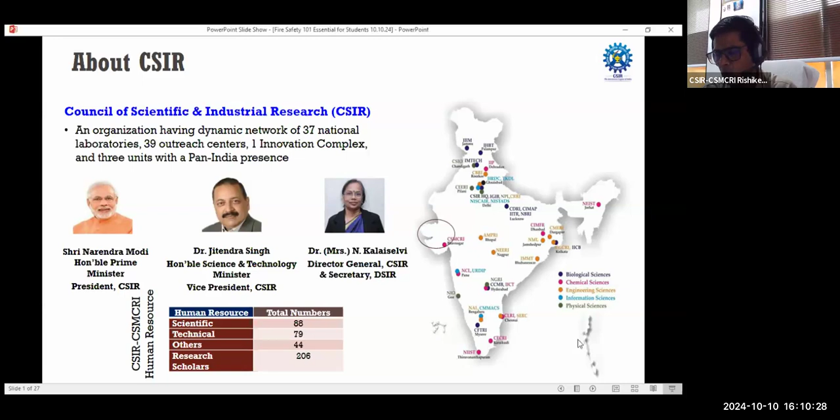Okay, so basically the journey of CSIR started with the huge demand of salt between 1947 to 48, and afterwards in 1948 the government at that time decided to constitute a committee with Shri P A Narielwala, and under the supervision of Sri C.C. Desai, the then Secretary of Ministry of Works, Production and Supply in 1951.

They started working to fulfill the demand of salt. So in Saurashtra, near about 125 acres of area was given by the government to us, and this institute was inaugurated on the 10th of April 1954.

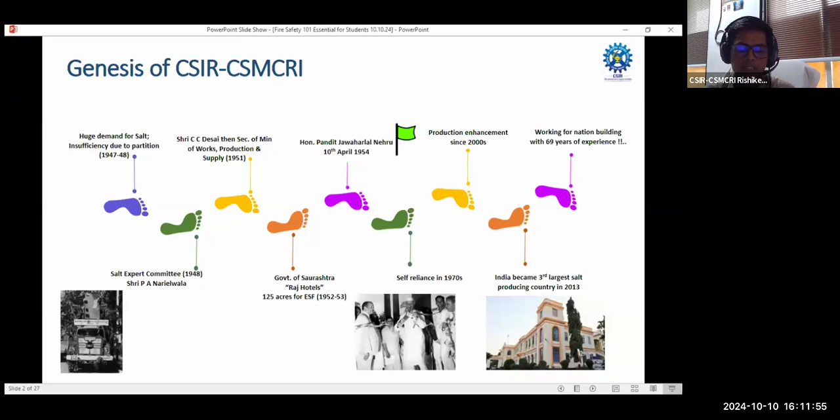We became self-reliant in production since the 1970s and 2000s. India became the third largest salt production country in 2013, and we have an experience of 69 years, serving to build the nation for the last 69 years.

Okay, basically our mission is based on three major pillars. There's our marine products and processes, in which salt, water, marine chemicals, and marine elements are included. Marine biology, in which marine aquaculture, salt tolerant plants, marine biotechnology, marine microbes, marine bioactive processes, and others are considered. And we are also focused on the marine environment, where we are exploring marine pollution.

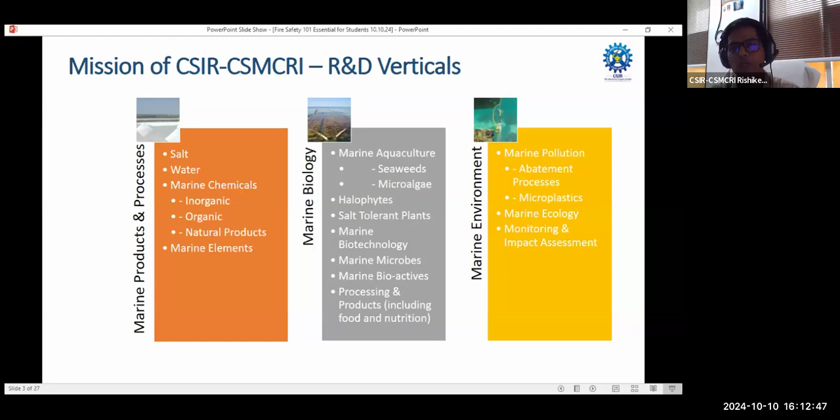Microplastics nowadays have become more of a headache for the environment, so we are also looking forward to how we can overcome the situation, along with marine ecology and monitoring of impact assessment.

In our institute, we have various departments, in which our major departments are Analytical and Environment Science Division and Centralized Instrument Facility, where you will find lots of instruments related to scientific work, and the analysis we perform in-house.

We have a Salt and Marine Chemicals department. This department looks after all the salt and marine chemicals related experiments, research, and how to enhance the productivity of salt. We look after all these things.

Inorganic Materials and Catalysis - we also deal with inorganic solvents and chemicals to give a social impact with respect to chemicals. Natural Products and Green Chemistry - this department looks after green chemistry and natural products.

Applied Phycology and Biotechnology is basically focused on marine algae, plantomics, membrane science and separation technology. This also gives impact on how we utilize water, or how we can purify water with the help of these membranes.

So we have a separate division for Electro Membrane as well, and Process and Design Engineering, where whatever process we are designing, we work on how to enhance it, how to go further, how to upgrade it. This division looks after that.

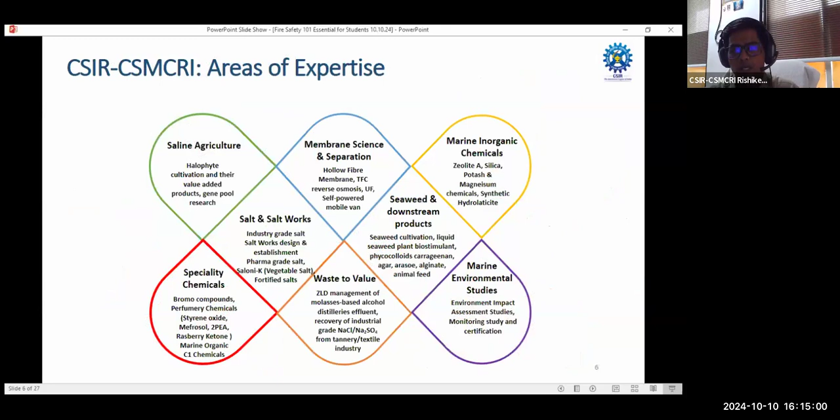Talking about the broad overview of current research, we have chemical research and biological research, and there are so many fields in which we are giving steps forward. The main areas of expertise are saline agriculture, salt and salt works, specialty chemicals, waste to value, membrane science and separation, seaweed and downstream products, marine environmental studies, and marine inorganic chemicals.

We also have ACSIR, that is the Academy of Scientific and Innovative Research, where if someone wants to do their PhD, they can join as a student and perform their PhD over here. We have two branches, PhD in Science and PhD in Engineering.

In 2022-23, we had almost 153 students, and we are also running UG and PG programs, with a minimum duration of 2 months for students. If someone wants to come for training, internship, or dissertation, they can also join.

So this is all about my institute in which I am working. Now we start with my presentation, that is Fire Safety 101: Essential Tips for Students. Okay, just before starting, can I ask you some questions?

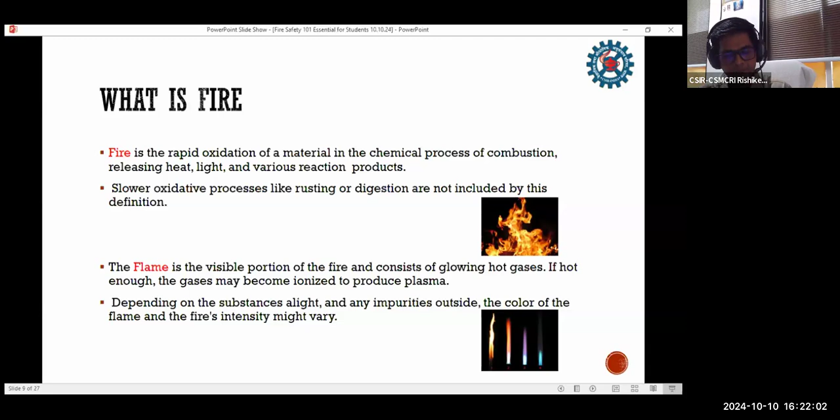To understand fire more, we have to understand the fire triangle. What is the fire triangle basically? The fire triangle is a combination of heat, fuel, and oxygen.

It will occur when the chemical reaction or the ignition is there. For example, you are sitting in your room or maybe in your home. All the three elements are present meeting with each other, but there is no fire just because there is no chemical reaction or any ignition taking place. When the fourth phase comes in contact with these three fire triangle elements, this is known as the fire tetrahedron.

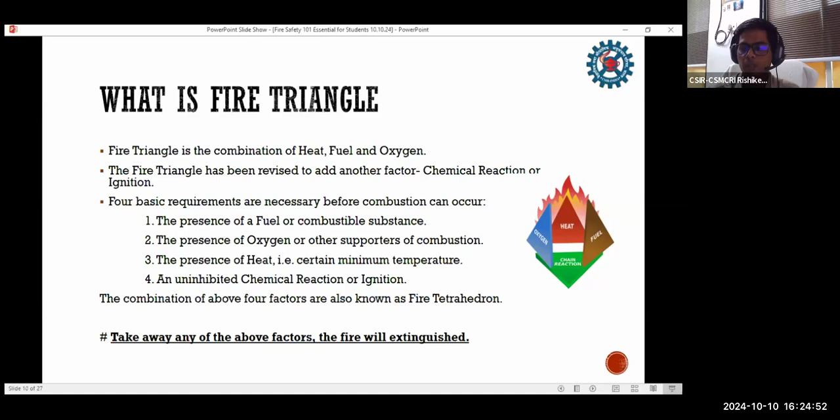So in that way you can extinguish the fire. Second, the heat. When fire occurs, we always use water to extinguish it. By doing this, we are cooling down the thing and cutting off the heat of that material. Third thing, the fuel. Just take away the fuel, do not provide fuel to the fire, and the fire will automatically extinguish.

Now, the classification of fire. This is the most important part to understand any fire for the extinguishment purpose, because when you know the classification of fire, you can easily understand which class the fire belongs to and how you are going to extinguish it. According to the BIS, that is Bureau of Indian Standard, fire is classified into four classes, that is class A, class B, class C, and class D.

Class A is basically known as the general fire, ordinary fire, or solid fire. For example, wood, paper, plastic, cloth, etc. are considered under this class. Class B is flammable liquids, all petroleum products, oil paint, solvents, and some chemicals are considered under this class. Class C, as per the BIS, has two categories, electrical and flammable gases, so these two are involved in class C. For class D, we have combustible metals like sodium, white phosphorus, etc.

But if you go abroad or away from India to any other country, you will find two more classes over there, that is class E and class K. According to that, class A remains the same, ordinary fire or solid fire. Class B remains the same, flammable liquids. Over there, class C stands for the gaseous or flammable fire. Class D remains the same. Class E stands for the electrical fire.

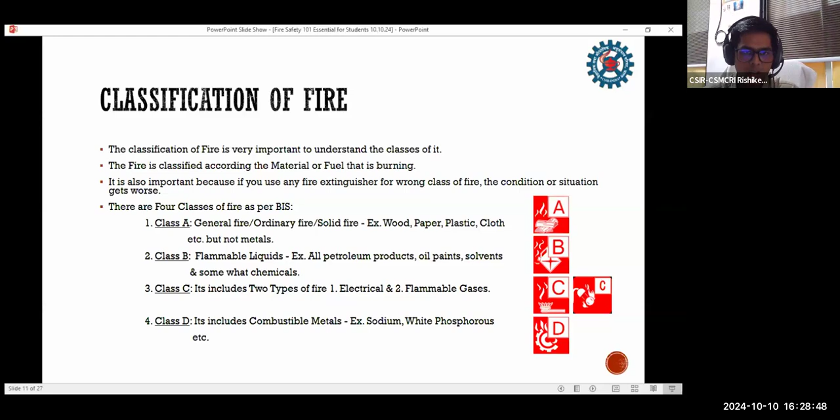Okay, basically we are having two types of firefighting protection. First one is active fire protection, and another one is passive fire protection. Active fire protection and passive fire protection, you can say, are the main pillars of any firefighting protection. These two elements cover a major portion of the protection service you should have all the time.

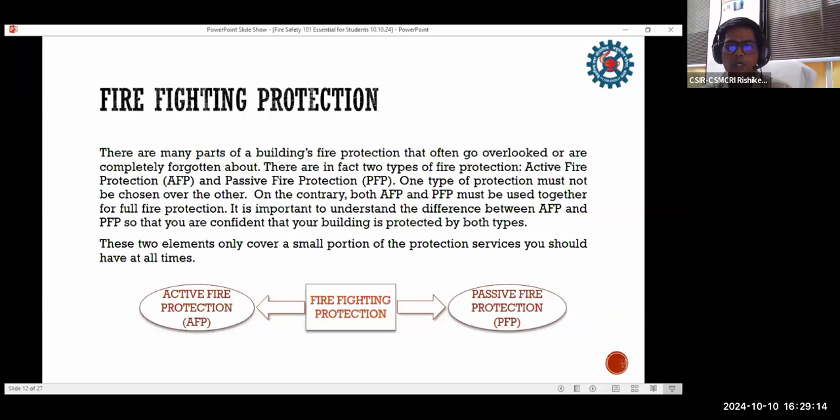So what is active firefighting equipment or protection? Active fire protection means using fire extinguishers or automatic fire sprinkler systems or any hydrant system which are actively activated all the time, and it requires manual operation or automatic operation.

For example, a fire detection system. If you take a fire detection system, after picking up a signal from any fire source or maybe smoke, it will trigger a response and alert the concerned departments, and activate the sprinkler system, or maybe it is assigned to activate a number of systems, like activating the sprinkler system, closing the fire doors, or maybe it starts sounding an alarm, and so on.

So these are active fire protection. Working fire alarm systems and fire suppression systems can greatly increase your chances of suppressing or even extinguishing a fire before it causes harm. So active firefighting means the equipment which are actively charged, or you can actively operate at any point of time.

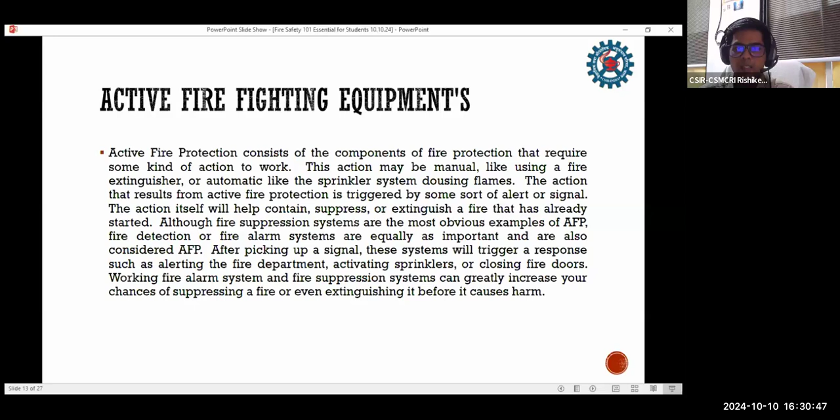Passive firefighting equipment means the fundamental components which are used to protect from fire in its design, or when you are just constructing something, it is already considered under this structure or design. Like for example, the walls. The walls act as passive fire protection.

By using fire walls or fire resistant walls and floors, the passive fire protection gives people time to escape from a building that has a fire.

For example, a damper. A damper means if something has happened, it automatically closes the door, that is called the damper. So something has happened and the damper gets the signal, and it starts to close the door and separate the fire and smoke through building ducts, and fire doors which compartmentalize the fire. By doing this, the fire will just adhere to a particular area, and the rest of the area will be free from the fire and can easily be used to rescue someone or for evacuation purposes.

By fireproofing successfully, compartmentalization of fire keeps damage to a minimum by eliminating the possible fuel a fire could use to spread or ignite within the first place. A small fire, or a fire restricted to a small area, gives you a greater chance of putting it out, avoiding cost and avoiding injuries.

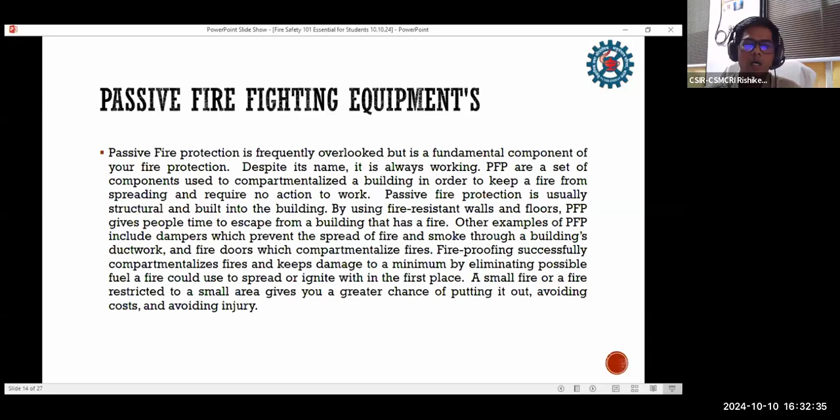So is it required, both things? Yes, we require both things. Why do we require both things? Just because it gives better protection against fire. The active and passive are fundamentally different in their behavior, but when we equip them together, they give a better possibility or better performance for better protection of life as well as the structure.

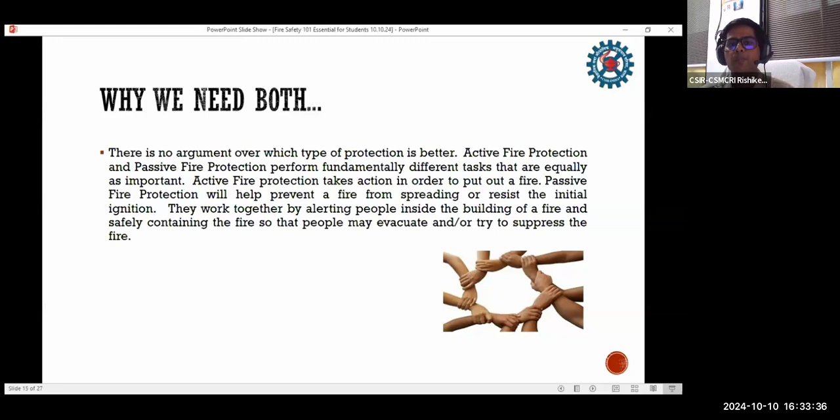It also helps to protect or prevent a fire from spreading or resist the initial ignition. They work together by alerting the people inside the building of a fire and safely containing the fire so that people may evacuate and try to suppress the fire.

Now, fire extinguishers. A fire extinguisher is a device used to put out fire of limited size. Basically, fire extinguishers are also known as first aid to fire. It means a small or moderate fire can be easily extinguished by means of a fire extinguisher.

With the help of quickly and effectively reacting to the beginning of an incipient fire, countless incidents have been prevented from developing into large-scale disasters. If you are quick enough to use the fire extinguisher in a proper way at the proper time, you can easily extinguish any fire and avoid further chances of large scale disasters, or avoid allowing the fire to spread to a higher level. As I told you, fire extinguishers are first aid to fire. Basically, these are available in the market in two variants.

First one is your cartridge type, and second one is your stored pressure. But nowadays, 90% of organizations in the market use the stored pressure type, just because it's very easy to use. You can easily operate the fire extinguisher and extinguish the fire.

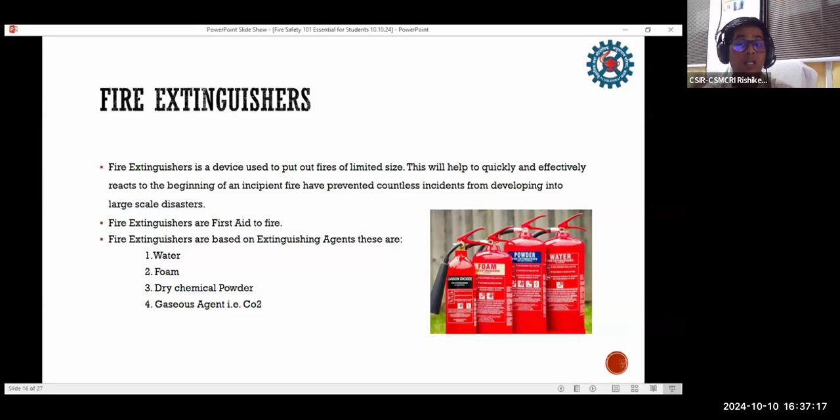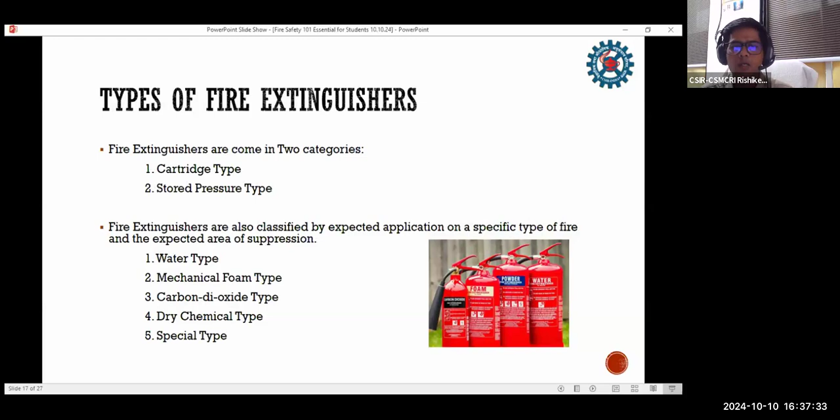So as I told you, we have two categories: cartridge type and stored pressure type. We have different types of fire extinguishers: water type, mechanical foam type, carbon dioxide type, dry chemical type, and special type. Now, how to use the fire extinguisher?

It's a very simple thing. When using the stored pressure type fire extinguisher, simply you have to remember one word: PASS. P-A-S-S. Pass means pull the pin. There is a safety pin on the mouth of the valve, you have to pull it, aim at the base of the fire.

The hose which is provided with the mouth of the valve, you have to hold from your hand. If you are a right-hander, you have to hold it from your left hand and operate the valve from your right hand, just because your right hand is quite capable to withstand the weight for a longer time. So if you are a left-hander, you have to hold the hose from your right hand and operate the valve from your left hand.

Now when you pull the pin and aim at the base of the fire, squeeze the handle. The handle or valve is provided on top of the cylinder, you have to press it very hard and throughout the way. So what will happen? The agent will be released and come out with the help of this hose. You have to aim at the base so you can easily and effectively extinguish the fire.

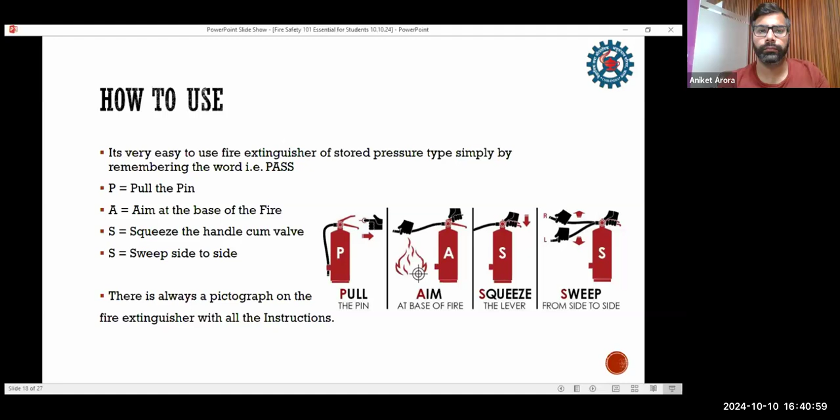And the last one is the manufacturing details, and recommended fire as well. So you will find, for example, a stored pressure one, it will be stored pressure dry chemical powder, B and C. B, C is also written on that, meaning this fire extinguisher is useful to extinguish the B class and C class of fire. So always remember, whenever you are going to use the fire extinguisher, first go through that pictograph so you can understand which type of fire extinguisher it is and how you are going to use it.

So there is a small video I'm showing you, an animated one, so it will give an idea how you are going to use a fire extinguisher.

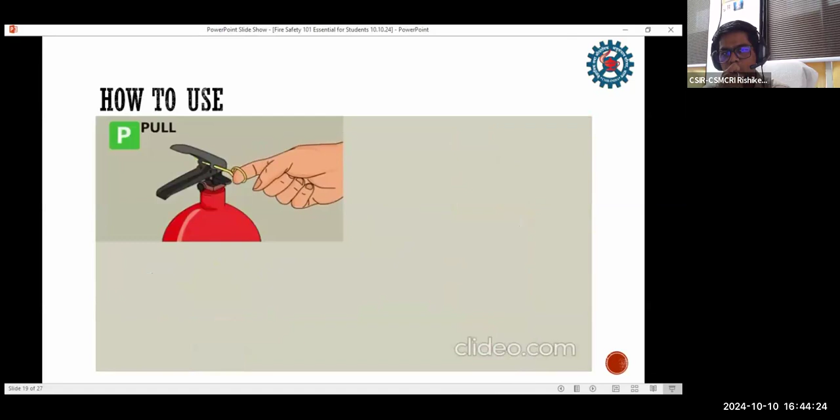So I hope this video is giving a clear idea how you are going to operate the fire extinguishers. But the thing is, there are limitations on using fire extinguishers. You are not able to use all types of fire extinguishers on all the classes. So this table shows that if you are going to use a water type, you always have to use it on class A, not class B, not class C, not class D, just because it has its limitations. Suppose you are going to use a water type on class B, what will happen?

It's a liquid type of fire, with flammable liquids present. So due to that density difference, the water will settle down at the bottom, and it will allow the material to spread all over, and the fire will spread. For class C, it contains electrical as well as flammable gases. So what will happen? Water is a good conductor of electricity, so electrocution chances will be there. That's why it is not recommended to use on class C. As well as for class D, since it has combustible metals, those metals can be reactive to water, so that's why it's not recommended to use on class D.

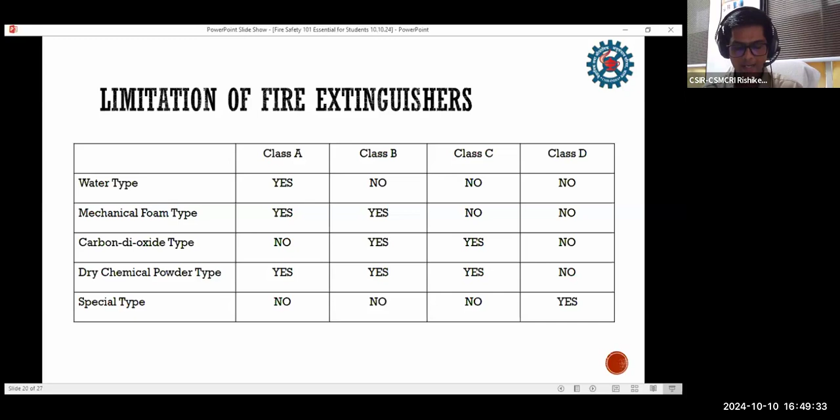Now, fire hydrant system. Another equipment mainly used for fire extinguishing is the fire hydrant system. It consists of a pipe network connected directly to the water supply, meant to provide water to each and every hydrant outlet, and it intends to provide water to the fireman to fight a fire.

Fire hydrant means hydro. In science, water is also known as hydro. So at a particular end, you require water with the help of some piping network, and that is known as the fire hydrant system.

The water is discharged into the fire engine form, which is then pumped and sprayed over the fire. It requires a particular system with many components. In the upcoming presentation, you will see which type of components are required for the fire hydrant system, as it requires different types of components to make a complete system.

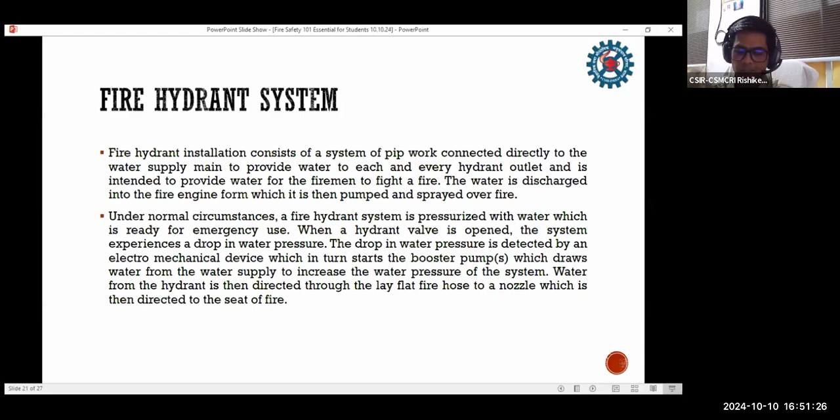Under normal circumstances, a fire hydrant system is pressurized with water, ready for emergency use. When a hydrant valve is opened, the system experiences a drop in water pressure, which is detected by a mechanical device or sensor. This starts the booster pump first, and if the pressure continues to decrease, the sensors allow the main pump to start, giving the required pressure to the system to put off the fire.

Basically, fire hydrant systems are of two types: internal and external, and each can be wet or dry. There are two major types, not parts, sorry - types: external and internal.

It is very simple to understand. The fire hydrant system which is outside the building, or covers the periphery of the building, is known as the external fire hydrant system. The hydrant system installed to give protection or firefighting inside the building is known as the internal fire hydrant system.

It also consists of wet and dry options. In India, we don't have such cold conditions, so we keep the system in a wet condition always. But in colder countries like USA or Canada, where there is ice and snowfall, they keep their system in a dry condition. Why dry? If they used a wet fire hydrant system, the water would freeze inside the pipe and the system would not work when required. So they keep the system dry.

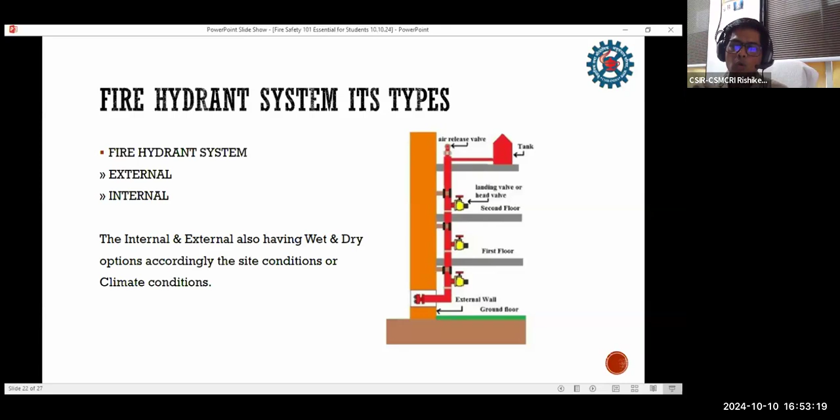They have different types of components installed in that system, and whenever they need to operate it in emergency conditions, they first release the air, and then the water flows throughout the network so they can extinguish the fire.

Basically, the main components of any fire hydrant system are: water supply and storage facility, meaning water tank, pipe network and valves, fire brigade booster inlet, fire pump set, hydrant and landing valves, fire hose reel, and the fire pump.

This is the hose box - the box in which the hoses are kept. Nowadays, two hoses of 15 meters length are used, so you can go up to 30 meters.

This is known as the fire hydrant valve, or main valve. This is the fire brigade connection - whenever you need to connect a fire brigade vehicle to provide water, you can connect it here.

This is the hose reel. You can also use the hose reel for firefighting purposes. It's very simple to use - only the valve is there. You have to operate the valve, and you can get water at your end.

A single person can also use this fire hose. But when you are going to use the fire hydrant main points, you require a team, maybe 2 to 3 persons, to operate this fire hydrant, just because the nozzle used for firefighting doesn't have any control system on it. So you have to control the pressure from the valve itself.

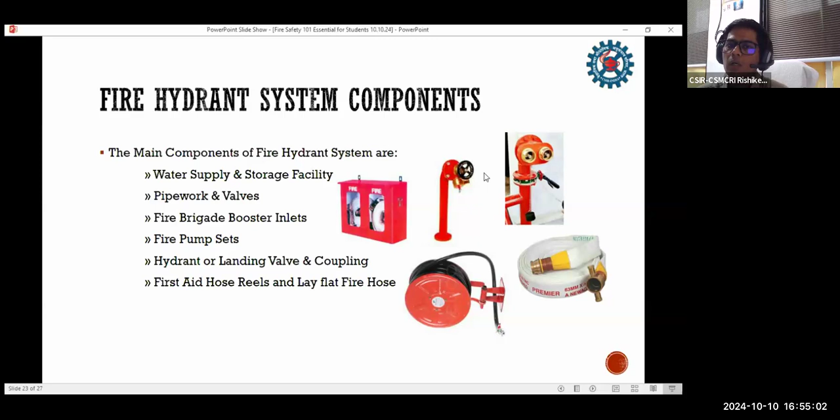So how to operate the fire hydrant system? First of all, it's very simple steps. If it is automated, there is nothing to worry about at all. Simply you have to open the valve. As I told you in earlier slides, when the water pressure drops, it automatically senses the pressure drop and starts the engine or the pump automatically.

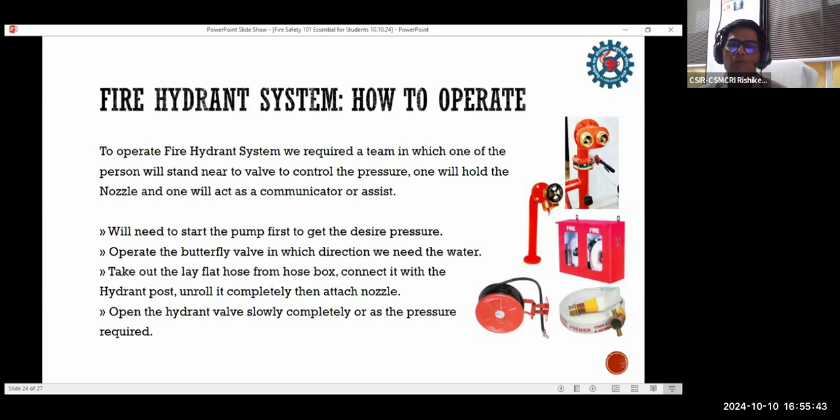But if it is manual, then first of all you have to rush to the pump house, activate the pump, then you will get the desired pressure for firefighting. For easy understanding, I am showing you a small one minute animated video which will give you an overall view of how you can use the fire hydrant system.

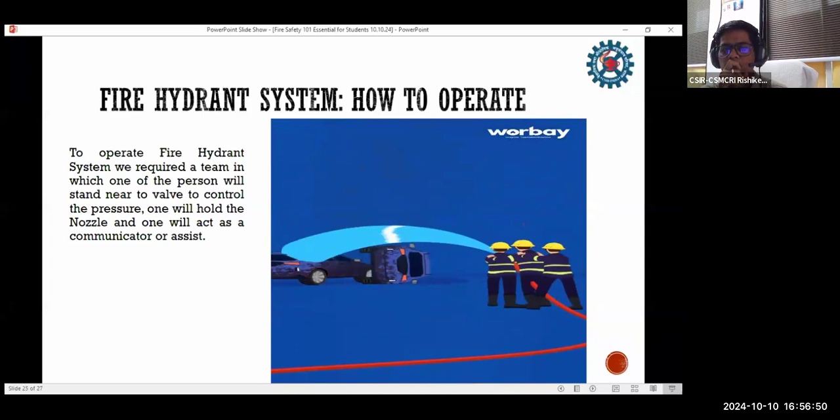I hope this small animation gives you a detailed, or at least a brief, understanding to operate the fire hydrant system.

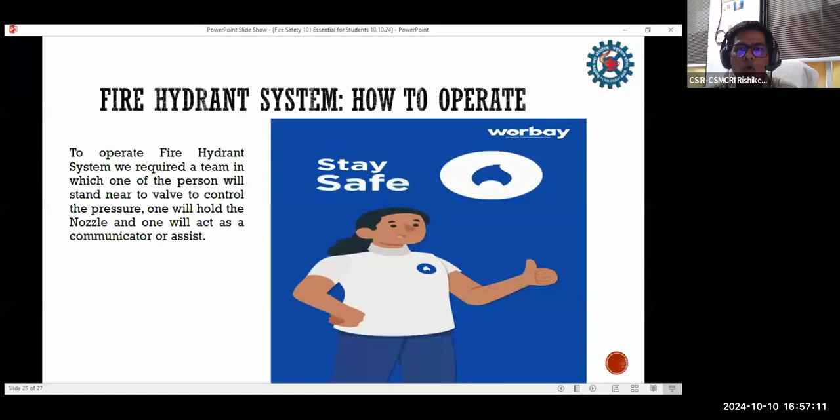The first thumb rule says your safety is your priority. Whenever you are dealing with any situation, first check whether you are on the safer side or not. If you are on the safer side, then you can act accordingly. But if you are not on a safer side, then you have to save yourself first and then act on that situation.

Second thing is to cut off the electricity of that affected area. Why? Just to nullify the chances of electrocution. Otherwise, what will happen? You are involving yourself in firefighting and suddenly a wire melts down and you come in contact with it. You will be electrocuted, and there may be no one to come rescue you.

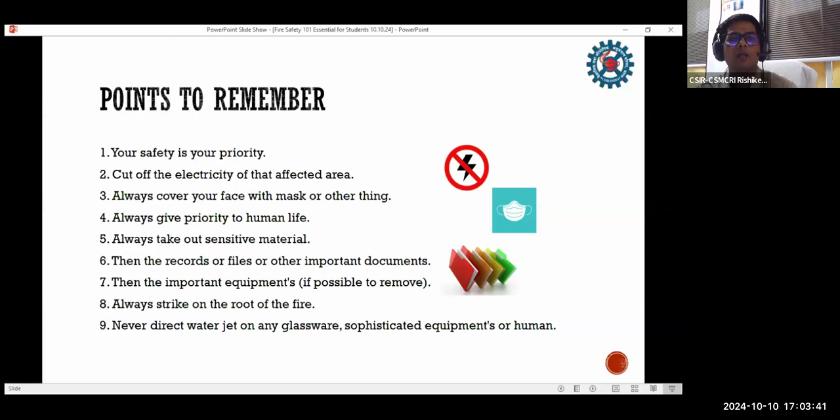There are so many things available at home which can be used to extinguish fire. For example, if your sofa catches fire, simply cut off the electricity of your home, wet your bed sheet, and cover the sofa with it. This acts as blanketing and will extinguish the fire. So be kind, be responsive, be safe.

Thank you. So over here, my presentation is over. I'm open to answer your questions, if any.